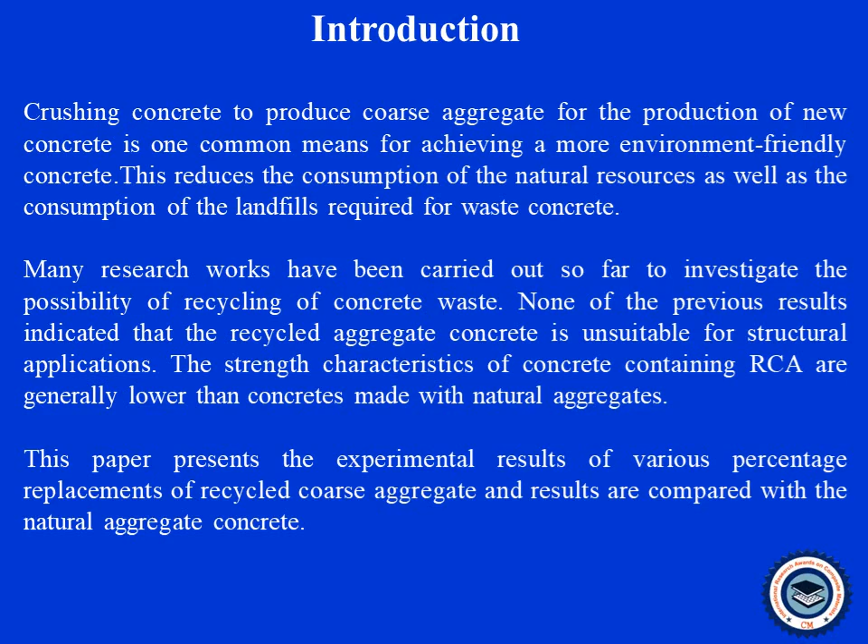The strength characteristics of concrete containing recycled aggregate are generally lower than concrete made with natural aggregates. This is because of the adhered mortar over the recycled aggregates. So this research presents the experimental results of various percentage replacements of recycled coarse aggregates, finally compared with the natural aggregate. We are trying with high strength concrete.

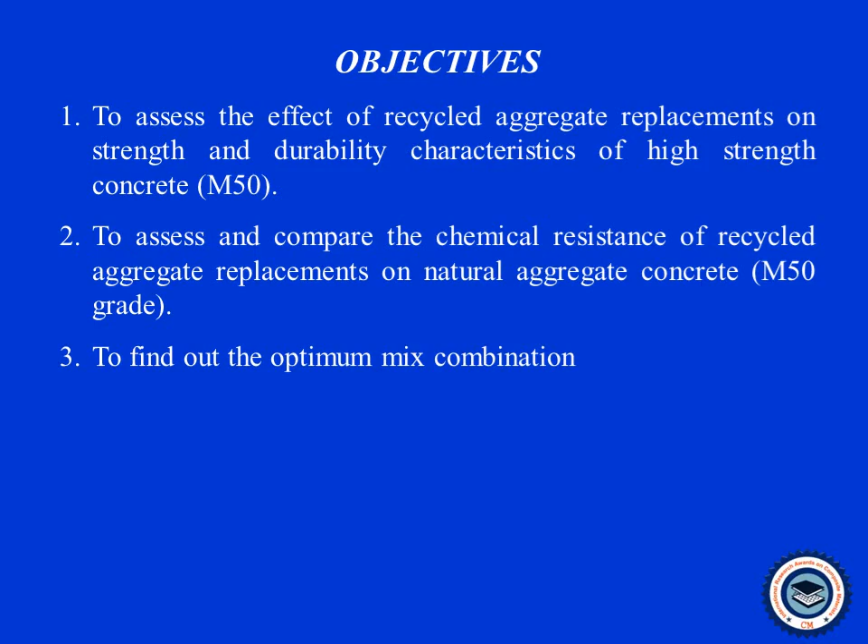The main objective of this work is to assess the effect of recycled aggregate replacement on the characteristics of high strength concrete, and finally to find out the optimum mix combinations. This is a simple methodology we are following to find the optimum mix combination for high strength recycled aggregate concrete. Here we are selecting M50 grade, and we have chosen 4 different mix combinations consisting of natural aggregate concrete and recycled aggregate combinations of 25%, 50% and 100%.

Here we are trying to find out the mechanical as well as the durability characteristics. Strength characteristics like compressive strength and tensile strength using cubes and cylinders. For durability characteristics, we tried the sorptivity test, rapid chloride penetration test and acid resistance test. We studied the effect of age of concrete at different ages like 7 days, 28 days, 56 days and 90 days.

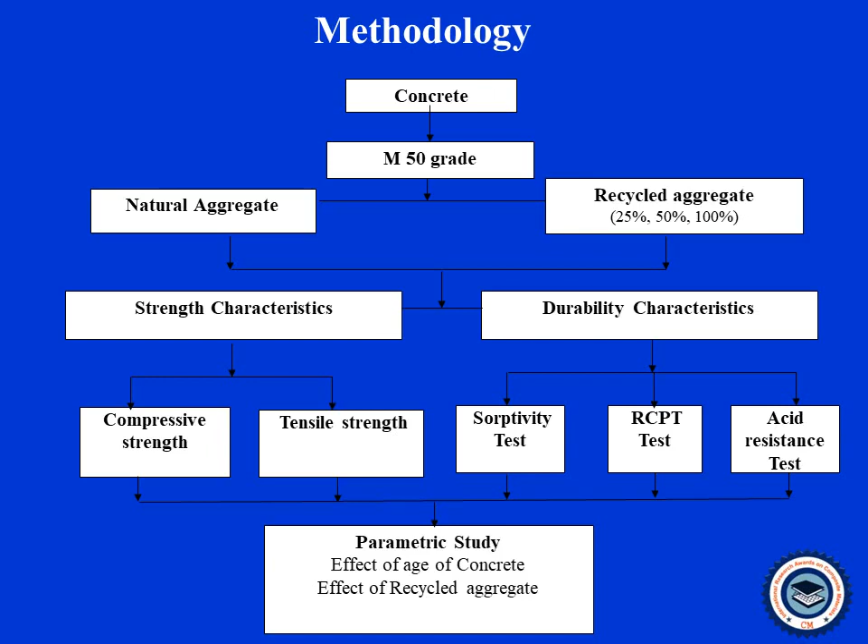The effect of recycled aggregate replacements was also studied. The final results are compared with the natural aggregate concrete, and the percentage differences and suitability of replacement of recycled aggregates was found out. These are the material properties used for this research work.

Ordinary Portland cement was used, and the specific gravity of the cement is 3.12. Ordinary fine aggregates were obtained from the rivers, and coarse aggregates, recycled aggregate having 2.7 specific gravity, are used for this work. Recycled aggregates are retrieved from a demolished building of age more than 60 years. The maximum size of the aggregate used here is 12.5 mm.

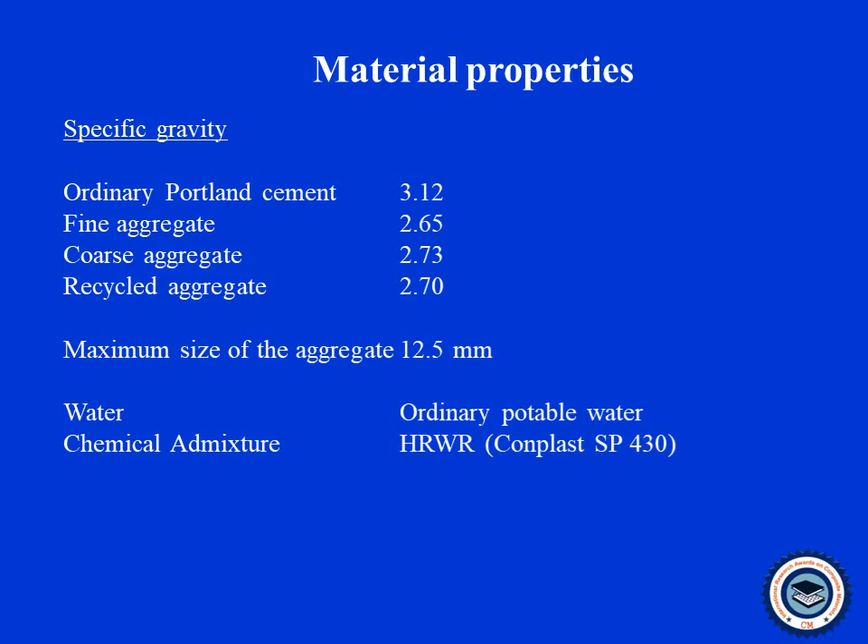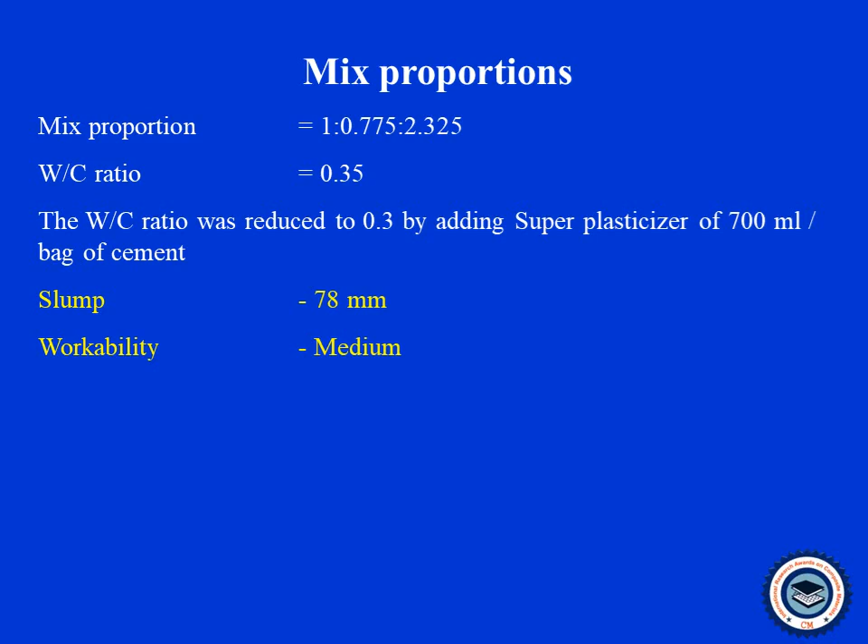We reduce the water cement ratio by using the chemical admixture Conplast SP 430. Here we tried various mix proportions, and finally we obtained the combination of 1:0.775:2.325. The water cement ratio for this is 0.35, reduced by adding superplasticizer, with a workability of 78 mm slump value.

We tried cube specimens and cylinder specimens for conducting the experiments. The cube size is 150 mm by 150 mm by 150 mm, and cylinder size is 150 mm diameter by 300 mm height. For the RCPT test and the sorptivity test, we used a cylinder of 100 mm diameter, a slice cut from the 300 mm height cylinder. A 50 mm height is maintained for both tests.

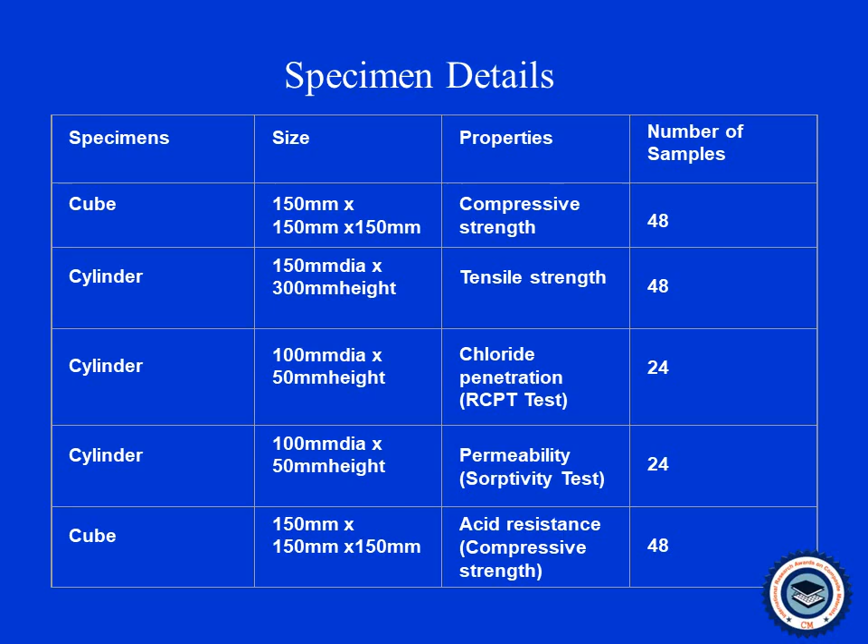Now we are going to see the results and discussion for the various tests. Regarding the compressive strength test, an encouraging trend was observed in compressive strength, with reduced cost and elimination of disposal and environmental pollution problems. Compressive strength of recycled aggregate concrete gets reduced irrespective of age when the percentage of replacement increases. Only a lesser reduction in compressive strength was observed at the earlier ages.

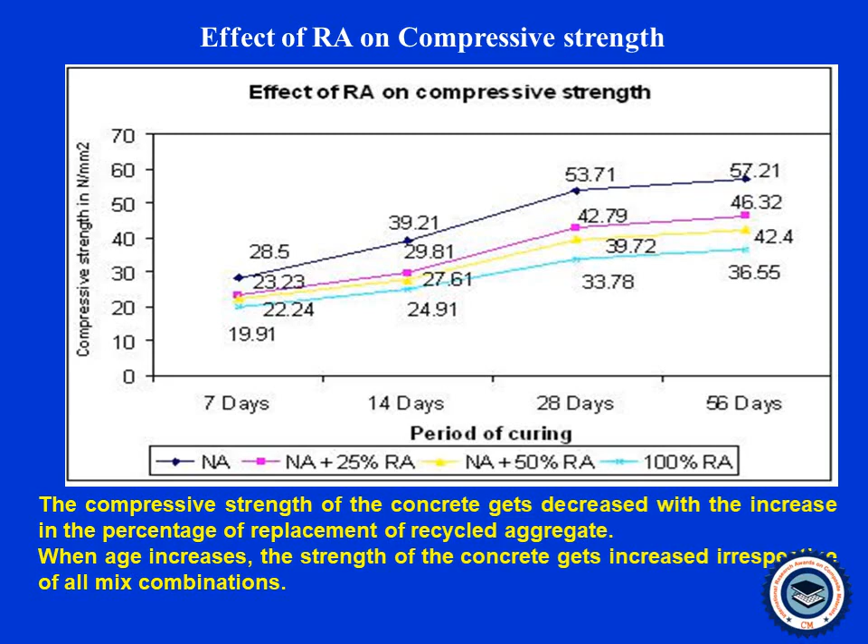At the earlier age of 7 days, it is 19.91 for 100% replacement, and at later ages the percentage difference is 36% for 100% replacement, and for 25% replacement we got 19%. So the percentage decrement gets increased when the age of the concrete increases.

From the above results, it was very clear that the recycled aggregate could be used as a structural concrete with some modifications in the mix design. In mix design, for achieving the expected strength, the cement content may be increased and the slump must be checked for the workability. So the adhered mortar over the recycled aggregate also should be cleaned. So the treatment of aggregate also will give you better strength results.

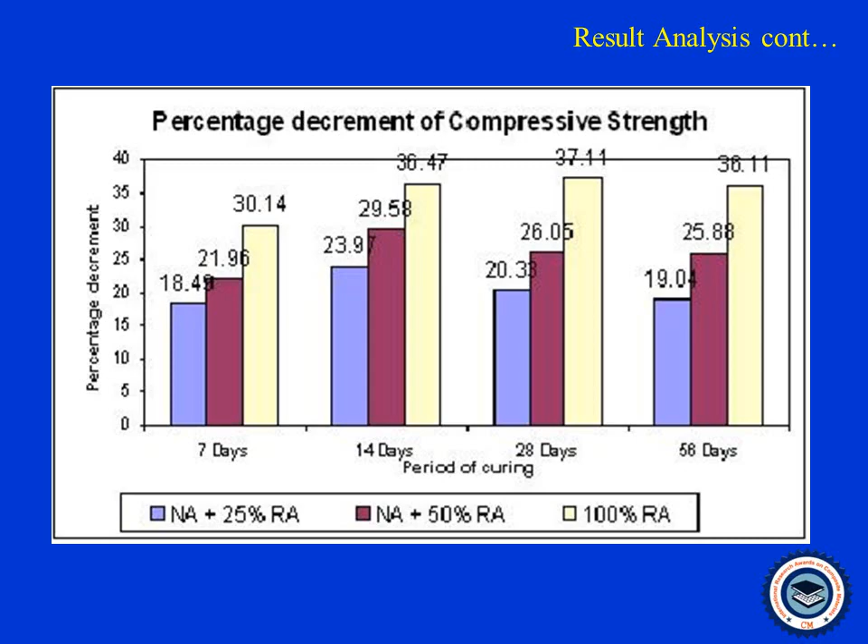Similar sort of results was obtained in the tensile strength. Here also only lesser value of reduction in tensile strength was observed at the earlier ages, and the percentage reduction in the tensile strength of concrete was observed as 5% to 26% for the 25 to 100% replacement. And at the age of 28 days, it increased to 15 to 35% for 25% to 100% replacement.

But the percentage decrement in strength gets reduced when the age of the concrete increased. At the age of 56 days, it was observed as 6%, 20% and 23% for 25, 50 and 100% aggregate replacements respectively. So from the results, it was very clear that the recycled aggregate could be used as a structural concrete with some modifications in the mix design.

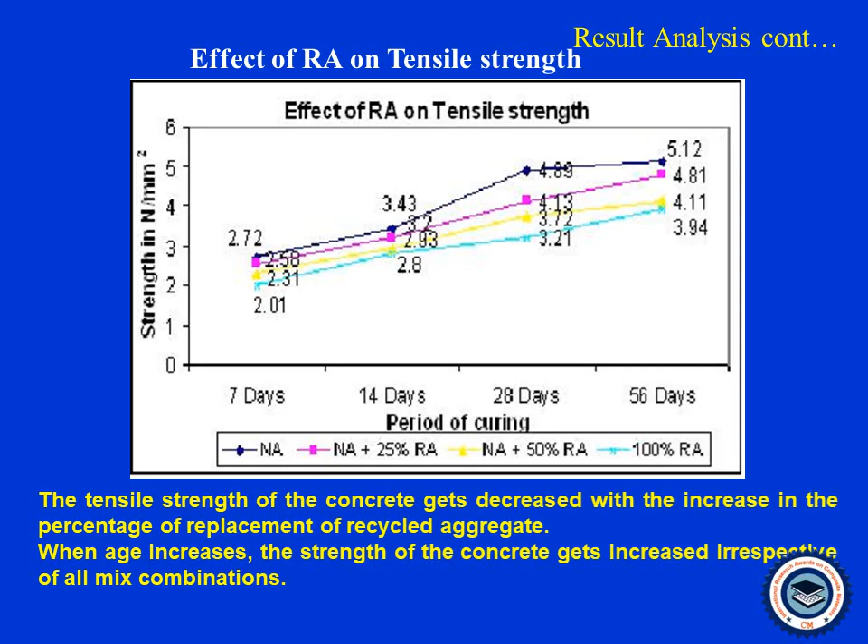It would also depend on the size, distribution, interconnectivity, shape and tortuosity of the pores, etc. In recycled aggregate concrete, the increment may be due to increase in the water absorption capacity of recycled aggregate because of existing mortar adhered even after the cleaning.

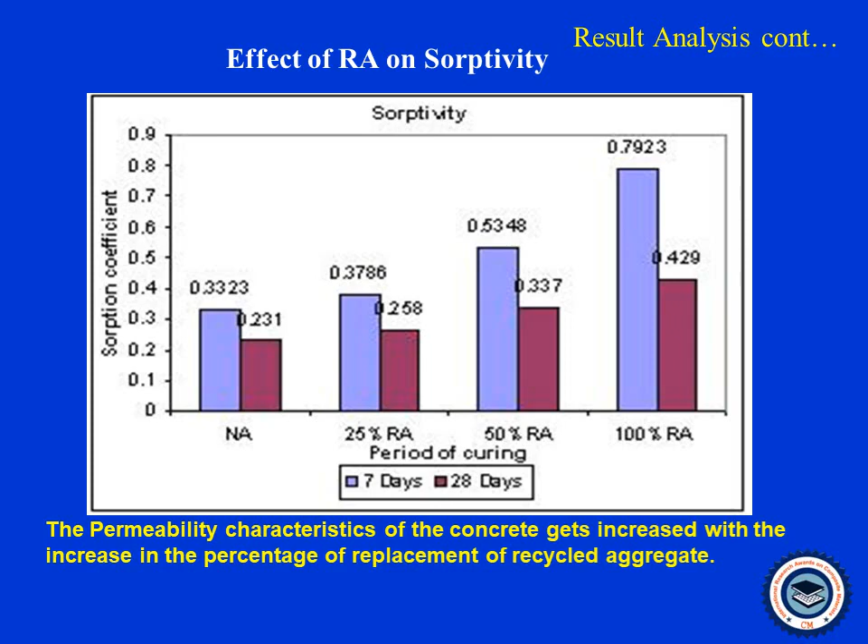Now the effect of recycled aggregate on the sorptivity test. So here we tried with the various mix combinations, 25%, 50% and 100% replacement of aggregates. During the earlier ages, the water absorption is very higher, because we know that the recycled aggregate is more porous than the natural aggregate. So the water absorption also will be very higher in the initial stages. But in the later period, it gets reduced and we got very good results.

From the results, it is understood that the total charge passed through the recycled aggregate concrete cylinder is greater than the natural aggregate concrete cylinder. So obviously the chloride permeability also increases with the increase in the percentage replacement of recycled aggregate.

But everything is in the limit only, because even for the 100% replacement also we got only 3627 coulombs. So that means that it is in the permissible limit, and its chloride ion penetration permeability is in the moderate range as per the RCPT test.

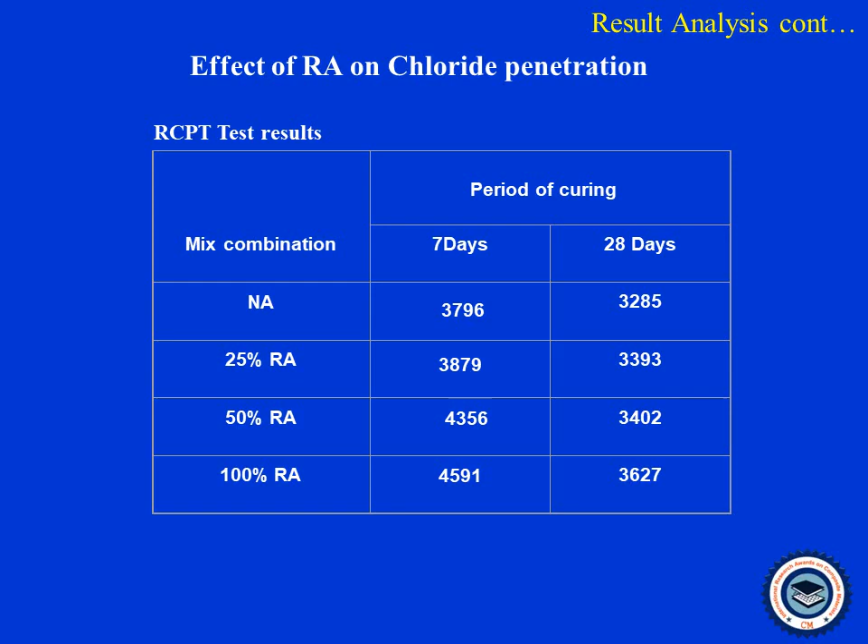Now let us see the alkalinity test. So alkalinity and resistance against the hydrochloric acid and the H2SO4. So the value of compressive strength was compared with the specimens cured in water, the H2SO4 solution soaked specimens and HCl cured specimens.

The compressive strength obtained for specimens cured in H2SO4 are comparatively lesser than the strength of concrete specimens cured in water. But it can be seen that the specimens are having relatively greater strength than that of the concrete specimens cured in 0.1 normality of HCl acid. The pH value is also one of the important factors to influence the rate of corrosion.

The normal pH value for the concrete to passivate the reinforcement against corrosion is 12. If the value comes below 9, the carbonation of concrete takes place and the corrosion also gets initiated. So the general pH value of the solution and the level of inducing corrosion in concrete was tested, and from the results it was very clear that the effect of HCl is very higher than the H2SO4.

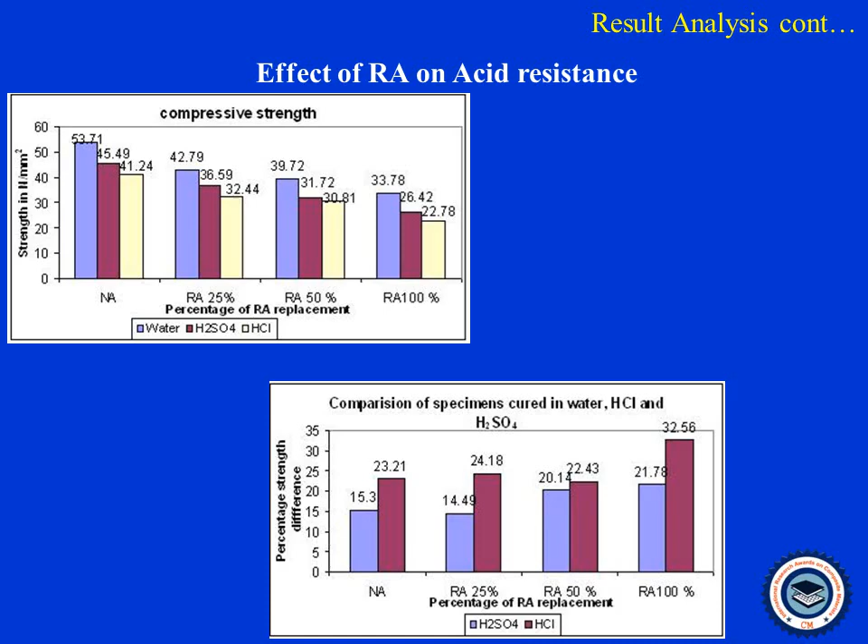The replacement of recycled aggregate decreased the resistance against corrosion in all kind of solutions. So finally we found that the possibility of corrosion is high in the 100% replacement of recycled aggregate concrete when it is subjected to HCl.

So finally we conclude like this: the aging of the specimen increased the compressive and the tensile strength irrespective of the replacement percentage of natural aggregate with recycled aggregate. The rate of reduction in the compressive and tensile strength increases up to the age of 28 days and decreases for further increase in the age.

The percentage of reduction in compressive strength of concrete due to replacement of recycled aggregate ranges from 19 to 36%. When natural aggregate was replaced with 50% recycled aggregate, the compressive strength obtained was around 35 Newton per mm square, which is almost 70% of the characteristic compressive strength and is acceptable for structural concrete.

Hence, it is suggested that natural aggregate can be replaced with 50% recycled aggregate in the field, and it can very well reduce the cost of construction and minimize the environmental disposal problems.